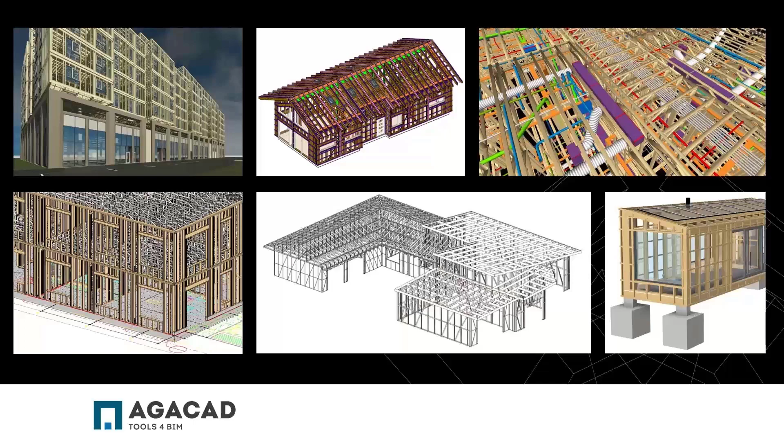So the key idea is to build BIM together, so that when the client side comes to play with Agacad, and us here working at Agacad, that's how the software propels forward, and how it's being developed, and has been developed for quite a while. With the help of clients who face actual issues when it comes to site management, production facilities, or exporting information from Revit to CNC or other formats, that's where we come together and try to find solutions to accommodate those demands or needs.

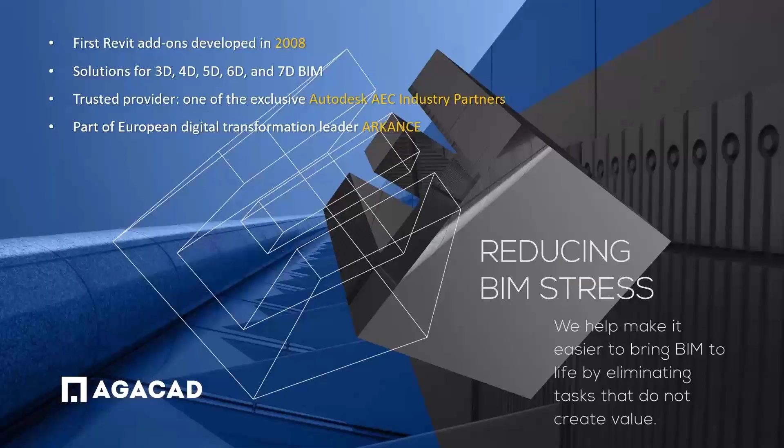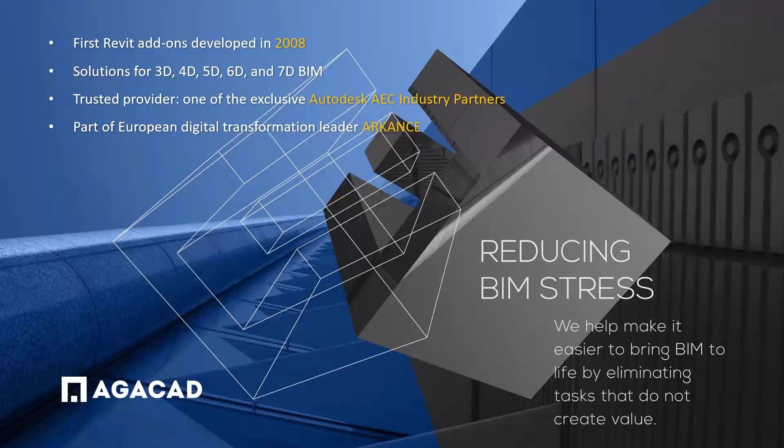The first Revit add-ons that we developed were back in 2008, so quite a while back, and they looked very different from what they look like today, especially when we talk about the user interface and user experience. So the functionality has expanded, but we're also trying to make this as user-friendly as possible, and that's always, I guess, the goal.

One of the goals. We are also an Autodesk Architecture, Engineering, Construction industry partner, and we are now part of European Digital Transformation Leader ARKANCE. That's not recent, that happened about a year ago. So we're now part of the larger thing as well.

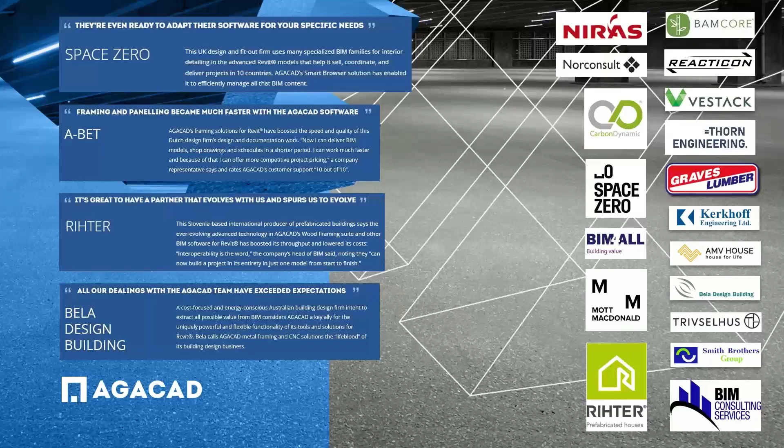We have client testimonials going back some years ago. There are some older ones, some more recent. In the slide, you can see some examples of current clients that gave feedback about using the software and how it benefits the workflows and the overall company performance. You can have a look at those on the Agacad webpage as well.

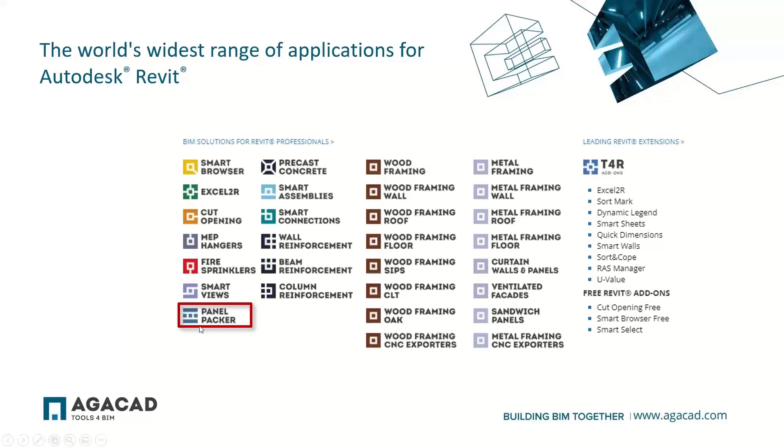Today we'll look at some of the concept of the Panel Packer, how it works, what's inside of it, what's the functionality, what's the workflow.

We'll look at the families, parameters, and placing or creating those bundles or stacks, and so on. For users new to Agacad, I'll guide you to the Agacad webpage first. Under products, you will be able to identify the Panel Packer. Press on that and you'll be taken to the product information page, where you can read through and watch the video there.

That's just the simple key information. We have a free trial as well over here. The free trial will take you to the Dock webpage within agacad.com, and from here you can download the Tools 4 BIM Dock. This is actually the only way how you can access the software or start using a trial of the software, by downloading and installing the Tools 4 BIM Dock.

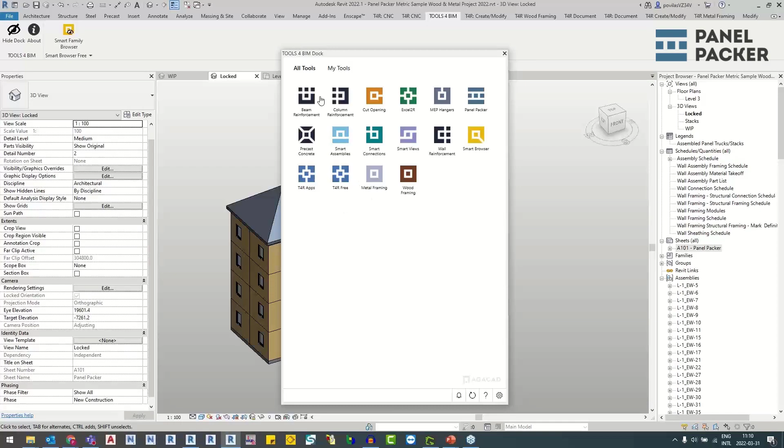You press on that, and you go for Show Dock. Now in the Dock, you have the entire portfolio of the software, and you just navigate to whatever piece of software you're interested in. If you're going for wood framing, you go there, and you have different packages available, and each package consists of pieces of software or add-ons bundled together in a package.

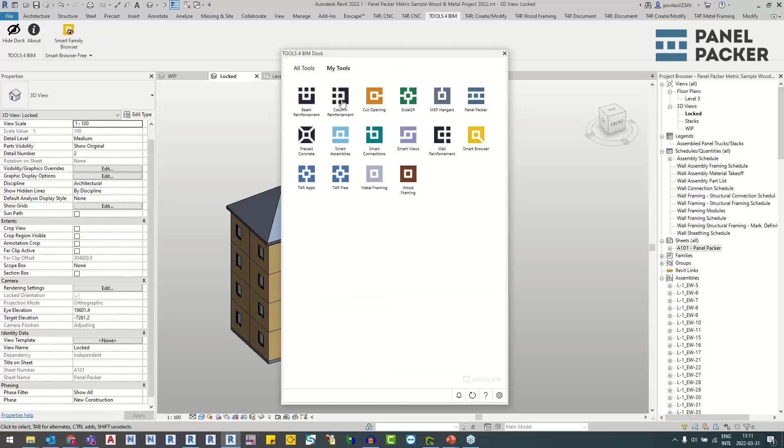So if we're going for Panel Packer, just go for the Panel Packer, and it's really not a package, it's just a tool on its own. Because I now have my license with Panel Packer activated, in your case you will see a different kind of page over here.

It will ask you whether you want to begin a trial, so you can do that. The trial is 14 days, and you can try out the software. Same goes for wood framing, metal framing, and other parts of the software.

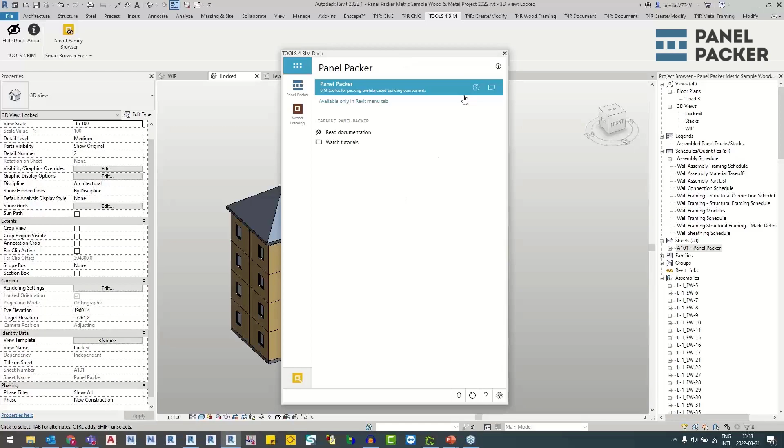So that's the Tools 4 BIM Dock. Now, once you activate Panel Packer, it's currently housed under T4R CNC, actually. This probably is going to change in the future, but it's currently over there, so Tools for Revit CNC. If you press on that tab, you can pull out the Panel Packer.

Just from looking at it, it's quite a compact piece of tool, not too complex. It's based on configurations, just like our wood framing or metal framing. It's quite compact, I would say.

The next bit I want to highlight is the e-help. For new users who don't know how to use Panel Packer, what it is exactly, what it does, you can navigate to the e-help page, online help page, from the e-help button. In here you have some technical documentation you can read through, some links to webinars and other video material, but also sample projects, both in metric and imperial.

Going back all the way to 2019, you can download those and kind of start there. That would be a good place to start, actually.

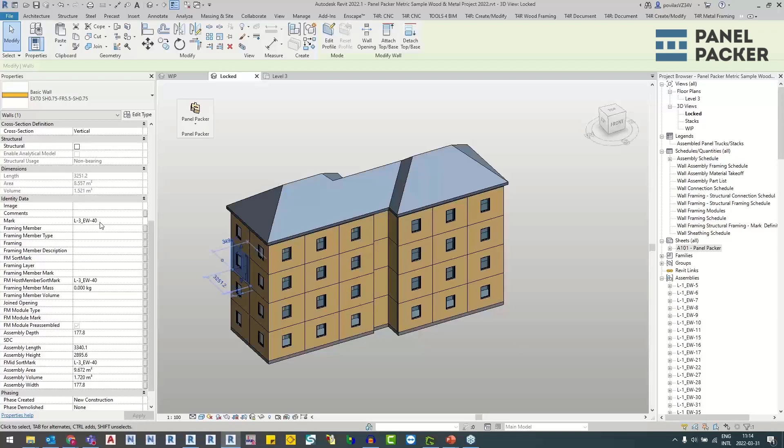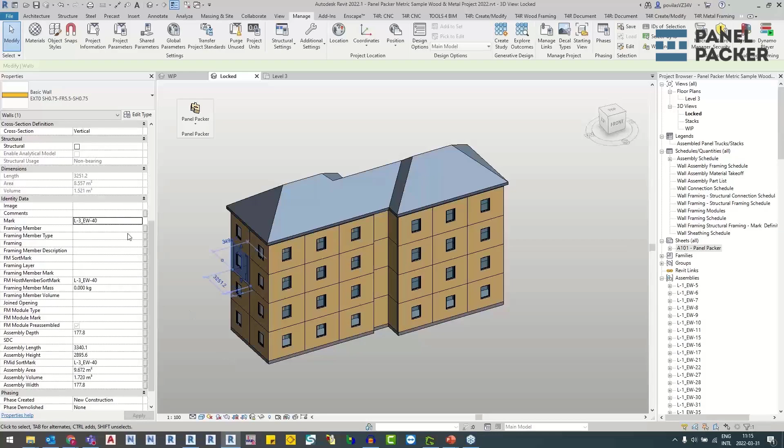Each wall has its own unique ID, so that's the starting point. You need to know which parameters you're going to go by to build and define your Panel Packer configurations, as it's based on those parameters. So level 3 external wall 40 - this kind of format or numbering convention helps me later identify and stack all the walls based on level, interior and exterior walls, etc.

That's the first step in this project. The next step, we used wood framing, in this case Wall Plus, and produced a framework for all the walls we had modeled. It's quite straightforward framing, nothing too special. We have some windows, some doors, and all the walls placed at the corresponding levels.

Once we've done that, we created assemblies for each wall structural framing assembly, named by the mark parameter of the wall itself, which has quite a few parameters. We have framing truck type, column number, and row number. Those four parameters come together with Panel Packer and will be filled in when we move into the packing or sorting stage. Generally we have things like dimensions, weights, depth, mass - all these typical things we can produce with Wall Plus.

Back to the naming convention that will be useful for us - in the comments section I've named Unit A and Unit B, splitting my building based on the two units I've thought of. That's just an example. You can use any empty comments or create new parameters and fill them in with identity information, so later on you can sort the assemblies easier.

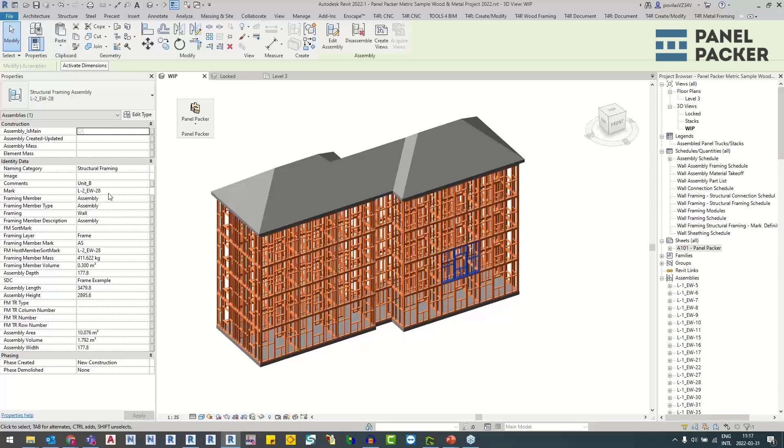Now if I go and pack all wall assemblies, these are the configurations I have created at the moment. I can pack only Unit A by level, only Unit B by level, level 1 structural frame, or interior versus exterior by level - different kinds of configurations I can come up with. I believe this will also be the set of configurations you see, since you'll start with a default set upon which you build your own database of configurations.

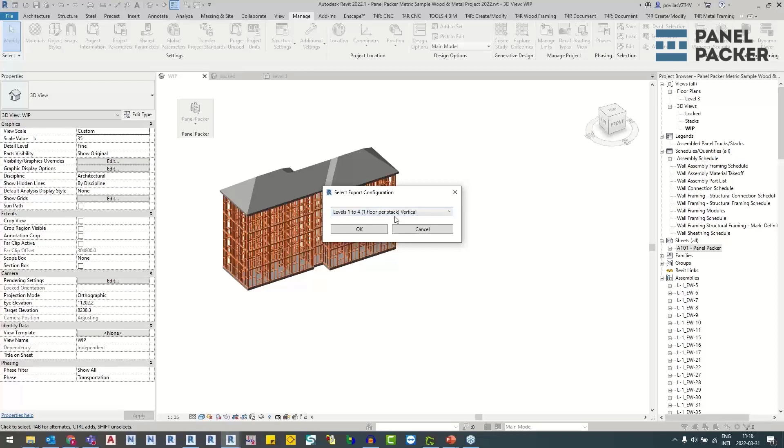So if I go to pack walls, perhaps this one - level 1 to level 4, one floor per stack. Each stack will house assemblies for an entire floor, placed vertically. In this one, I'm not differentiating between Unit A and B.

You press OK, and then press on the empty space anyway. You can switch to plan view and press anywhere that won't get in the way of something else, just somewhere on empty space, in 3D view or plan view.

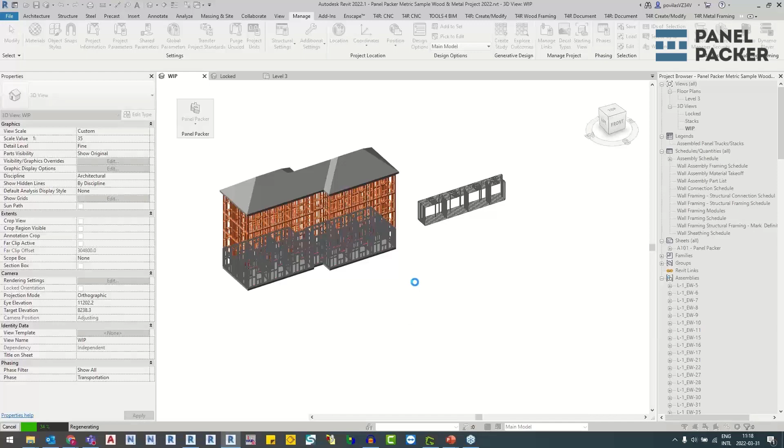Now the configuration is set up so that each click of my left mouse button creates a new bundle or new stack. Level 1 is just over here - I can create a level 2 stack, level 3, and level 4 eventually. It's kind of subjective, just pressing on empty space, but that allows the software to create the stacks.

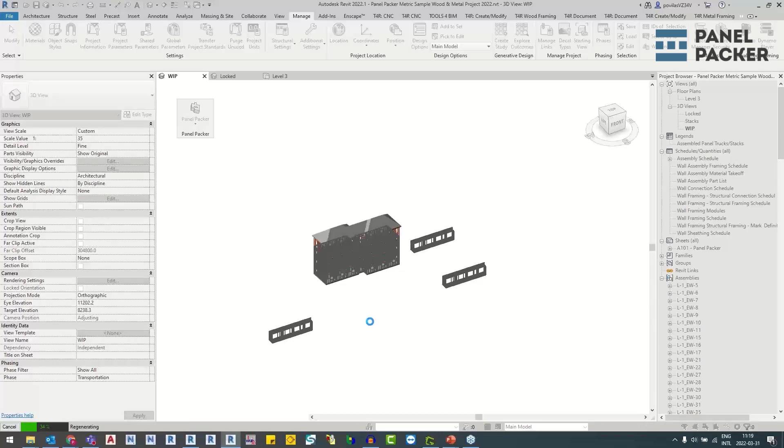You can later move those stacks or bundles anywhere you like - place them in design options, place them in phase options, in work sets actually. You can do that as well.

Now you can notice the colors have changed to indicate what happened in terms of stacking. The color comes from this being a sample project - you'll have the exact same project if you download that. So the color coding comes from the filters I've applied.

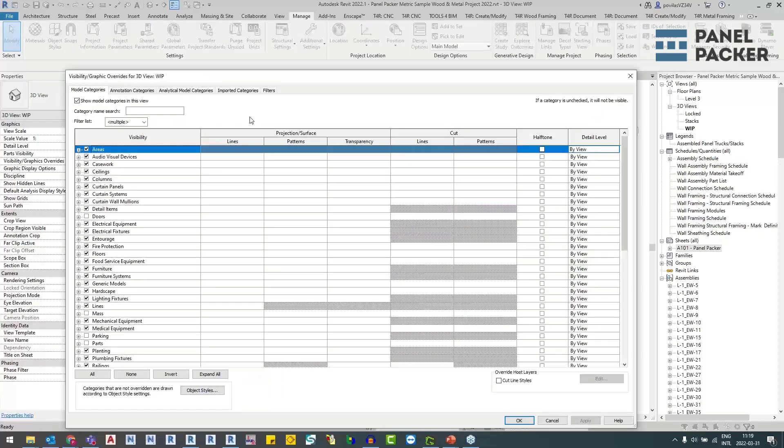Before going into filters, if I select each or just one assembly, I can see those four parameters have been filled in - that's the truck type, you could say the truck name or a stack or bundle name. So that's the name, the column number, truck number, row number. We know exactly where this assembly belongs, and we can identify it just by looking at the colors.

Now if I go to graphics and visibility overrides and go to filters, I can see I have set up some filters and incorporated some color coding. The filter is enabled, and if I go into the filters, you can see I have 10 different filters, and each filter is really looking at framing truck number.

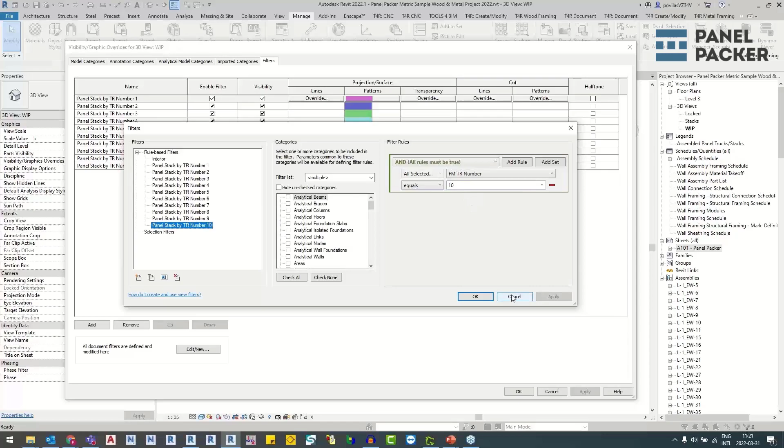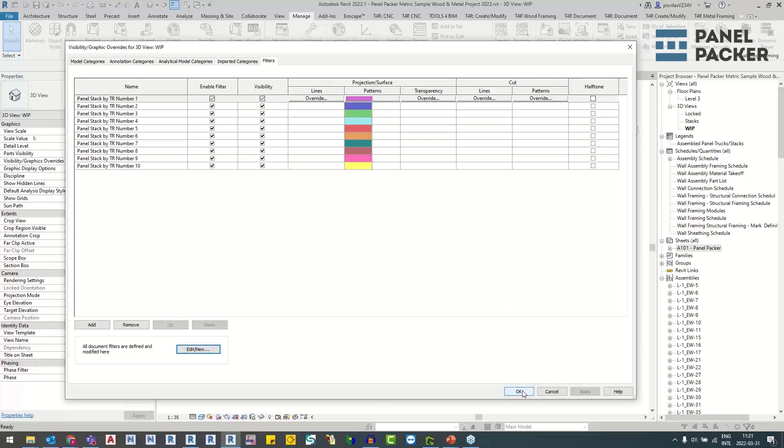So truck number equals 2 or 10, that will be a different color based on the coloring filters. That's the idea, and I find this quite convenient to use the color coding throughout the project, whether it's a 3D view or plan view.

It just brings some more clarity, I guess, to the project. So the other bit is that the elements are placed vertically in the stack, and each stack is an assembly of its own right, but that's a generic model assembly, because I can go into the assembly and select any element.

And it has information as well, inherited from the actual assembly. So the parameter values have been taken from the assembly, and we know which assembly. So this one represents the L1EW16 wall assembly, in terms of size, depth, height, length, mass, volume, and we know exactly which assembly it is.

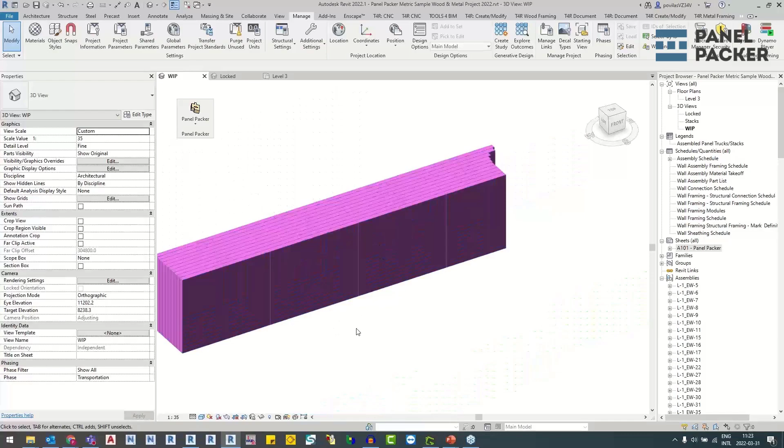So that's pretty much the idea. It's looking at each assembly's size and other identity data information, and reproduces all that information in the form of a generic model family, correct in terms of size, proportion, and naming as well. It's placed in the stack based on the configurations we have used. So that's why it is a generic model assembly, because it contains generic model Revit families, and it's also an assembly.

You can disassemble it, kind of shuffle the stack, but the point of this is to use configurations and put together stacks of wall, floor, roof assemblies or panels. So if you disassemble this, we can do that, but it's kind of losing the point of using the panel packer. So that's a generic model family.

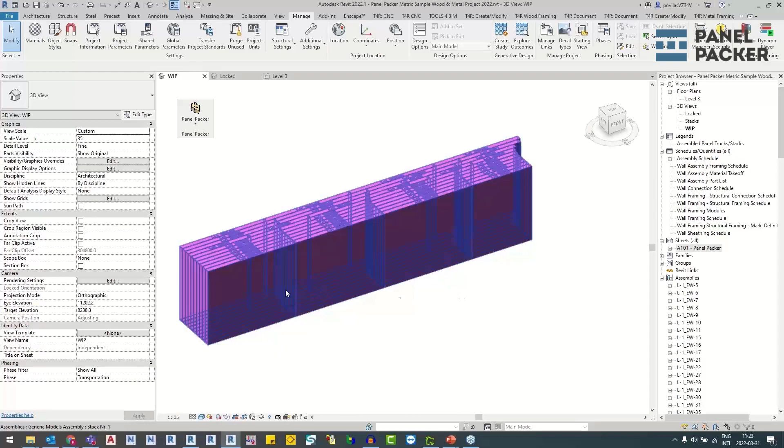We can zoom in and we can see the marking actually tells us here what it is. We have some type parameters, materials, so name material - that's general material for this.

I mean, we can change how this looks. Name, depth, text size - we can change that. We can apply also material to the text, I guess. You'd probably just want to apply something that would stand out, maybe black or anything like that.

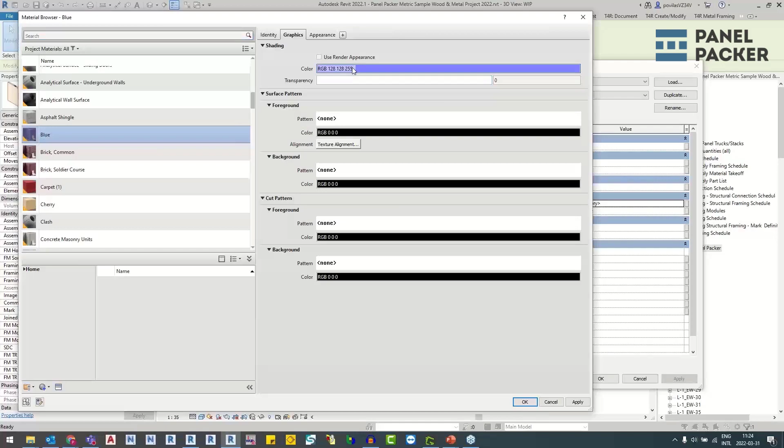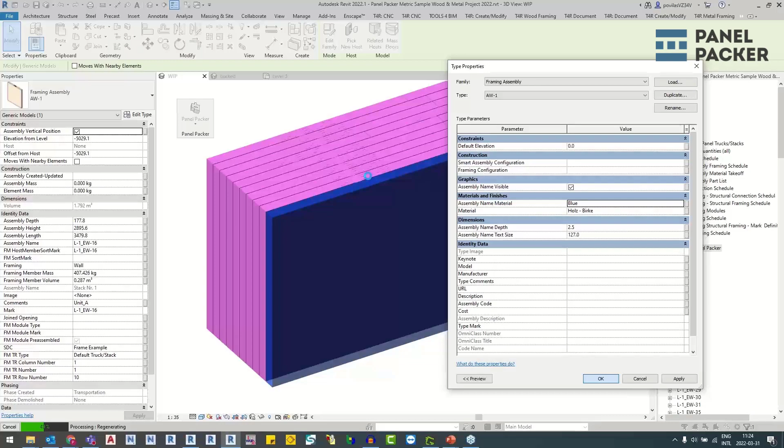So that way you can identify just by looking at the color coding or the marking of each assembly, or you can create a schedule and have all of these generic model families that represent your assemblies shown in the schedule. You can also schedule things based on a bundle or stack.

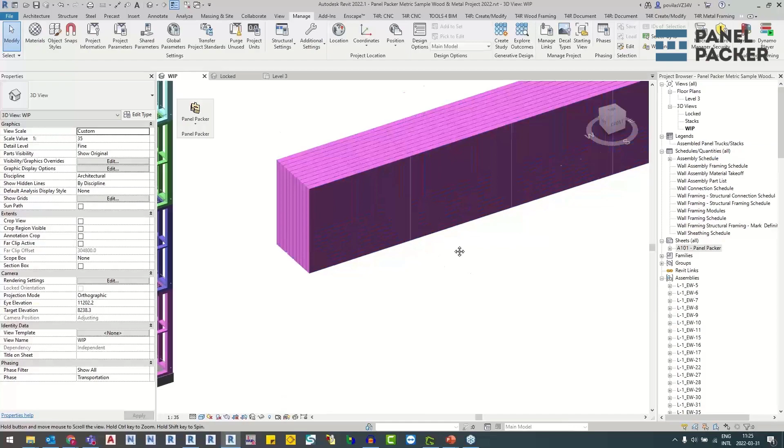You can also go into the family and make some modifications when it comes to graphics, visibility, text, etc. So you can do that. And now if I go to level 3, we have the 4 stacks all over the place.

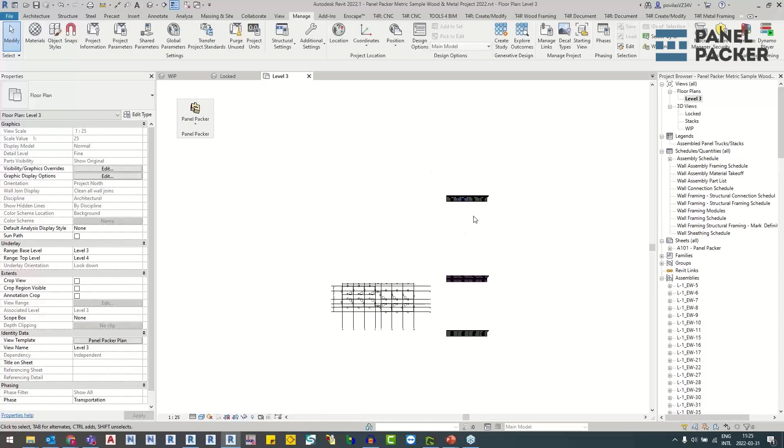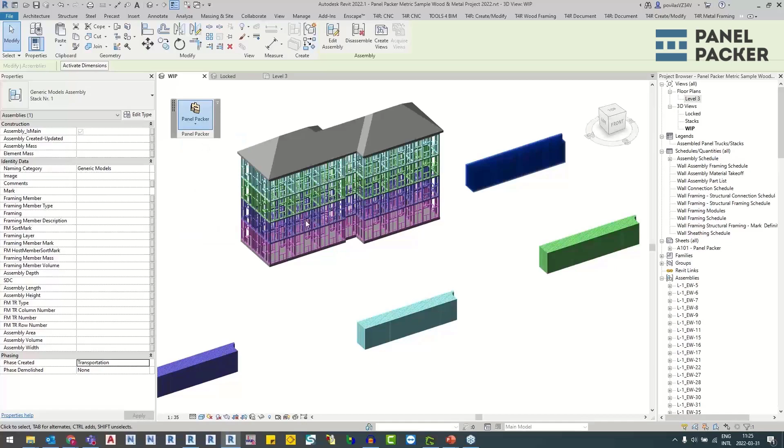The other thing, please note, is that if we go back to 3D view, they are placed in transportation phase. That's, I think, default to Revit. So you can create any phase and place those bundles or stacks in a particular phase. You can go into packing configurations and set up in which phase this will be placed. I've chosen transportation. So if I switch to new construction...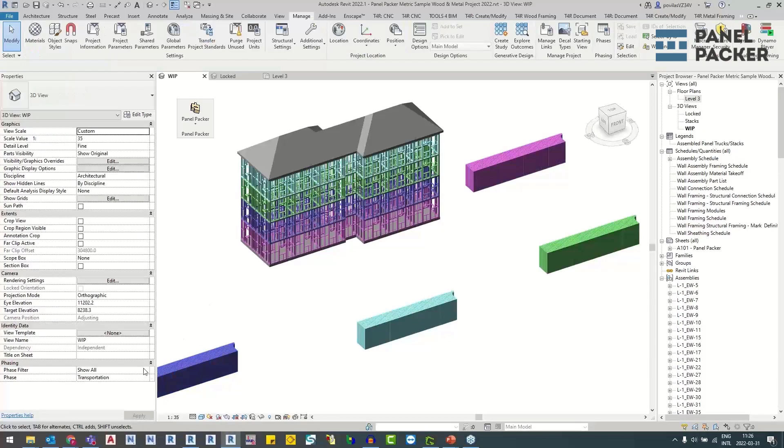Sorry, did I place this one? Okay, I wanted to switch my view to new construction, and in that way the stacks or bundles are not in the way. So that's perhaps a convenient thing to have.

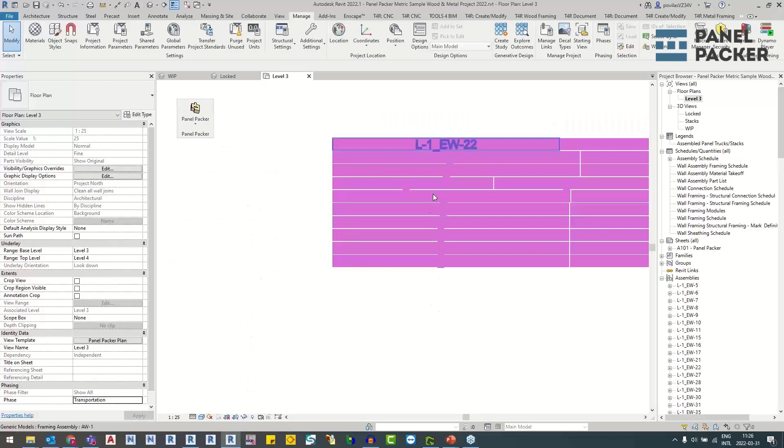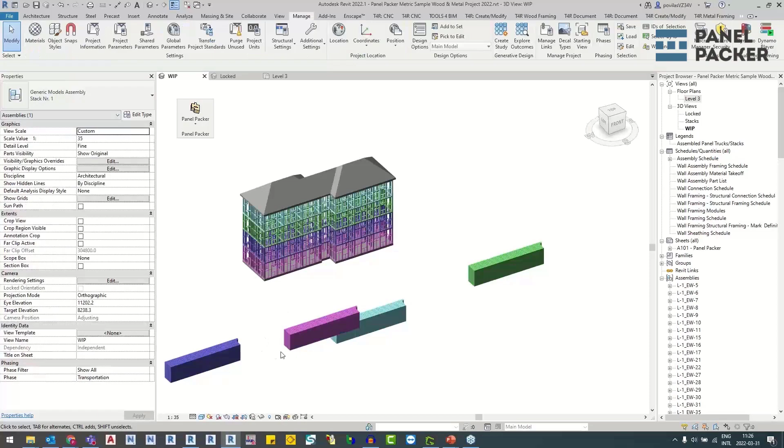So going back to this view, I'm able to read what is where, and also should be able to move those stacks as well, so you can move them anywhere you like. What level is it? It also tells me stack number 1, 2, 3, 4, etc. So you can move things around, obviously.

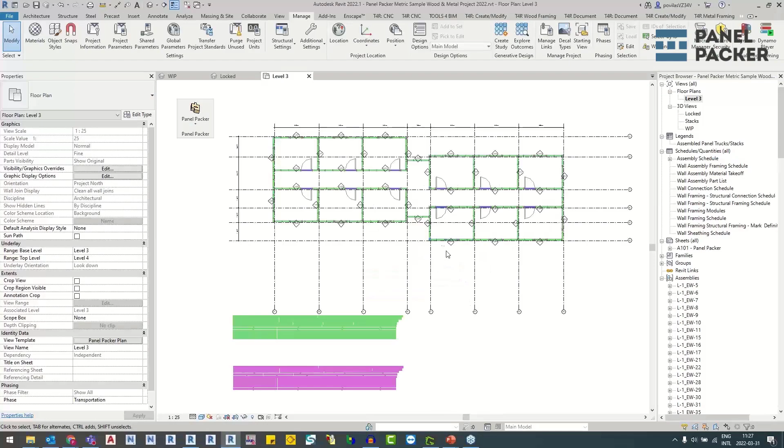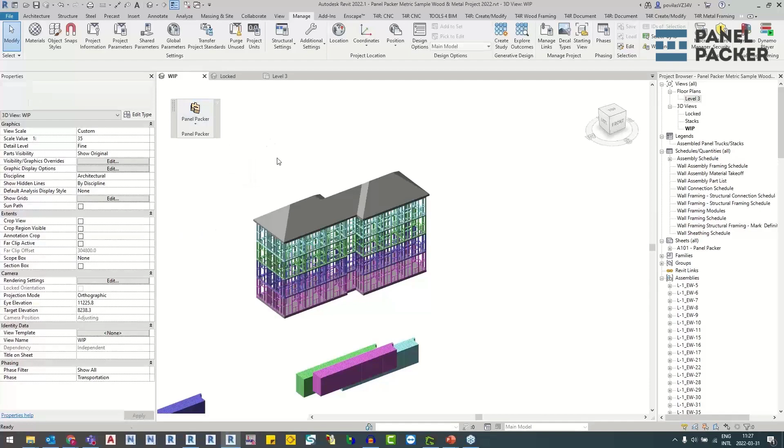Yeah, so that's pretty much the idea. And I guess that's really the functionality - it should be positioned properly in the 3D space, but that's pretty much the functionality. I don't want to go into the configurations too much. We could have packed our walls using a different kind of configuration, but that depends on how you set this up.

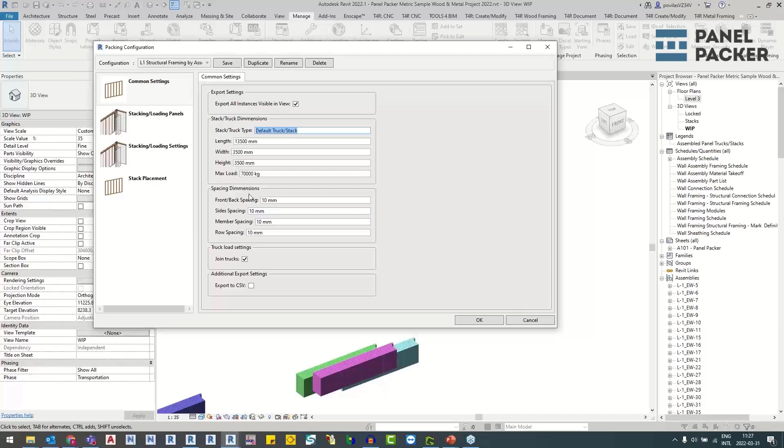If I quickly go into packing configurations, these are different configurations. Some common settings: you can change the name, spacing between the panels, etc. Stack placements by single point or separate points - we've done 4 separate points actually in our example, and the phase as well.

And over here, that's where we define how the stacks, based on what parameters, will be defined and put together. So we're choosing certain parameters, taking the first, second, or third value of that parameter and adjusting things that way.

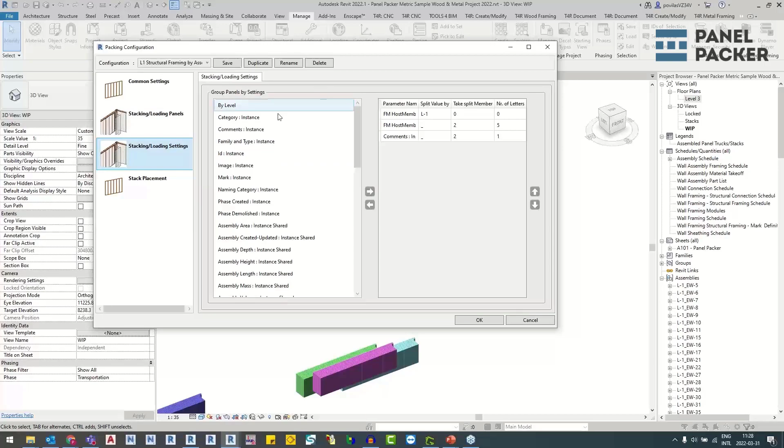We also have the filtering and stack orientation. That's kind of a compact set of functionality as well. I guess the main area is over here, the stacking and loading settings based on the parameters. That's pretty much the idea.

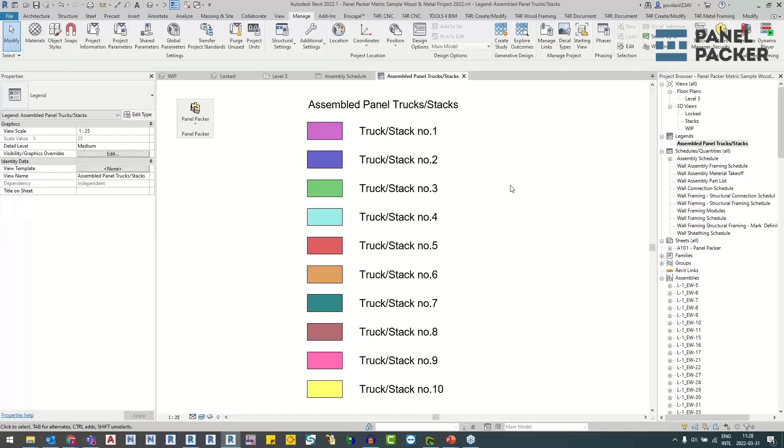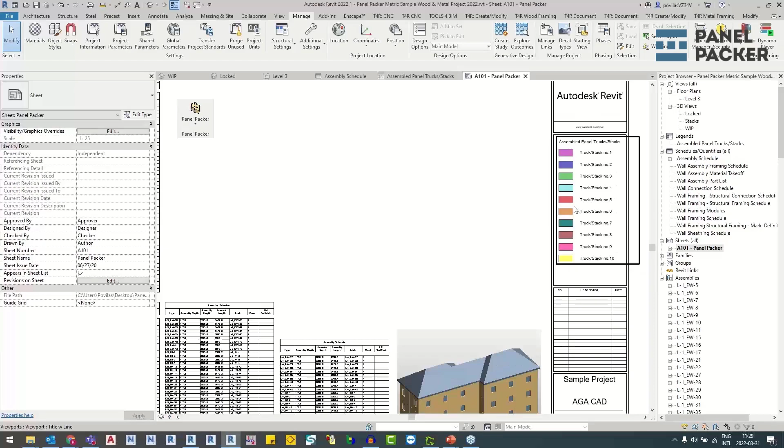And yeah, so also these are all different assemblies - sorry, that's the assembly schedule. That's my legend. I'm looking for my sheets, which is over here. So then you can place things on the sheets. I have created a legend based on the color coding, and I also have the assembly schedule.

So that's just an example of how we can put together sheets with schedules and views if you're defining your stacks, and the sequence in which the stacks will be delivered on site, whether that's site work or the facility. So probably just like to place a 3D view.

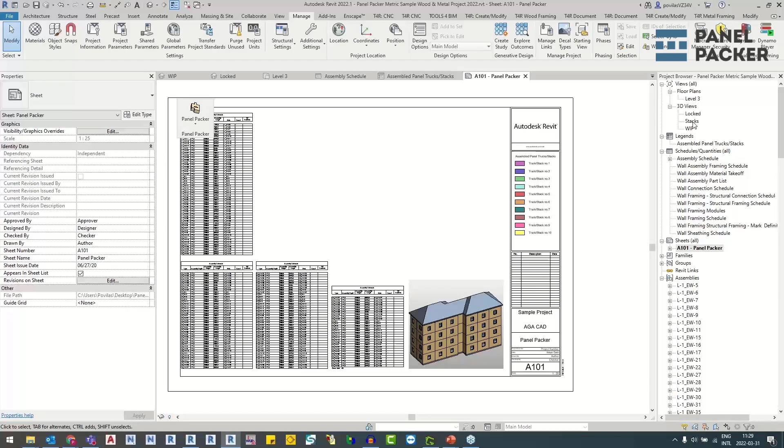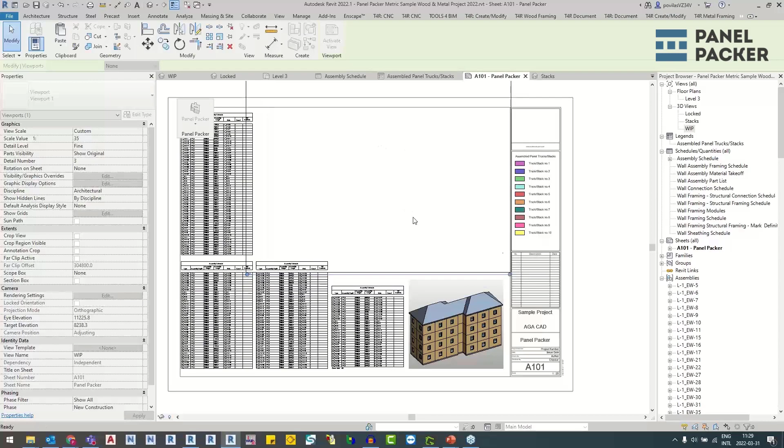So yeah, we want to change the scale, and kind of go from there. I mean, we can use smart views to produce more elaborate kinds of views if that's necessary.

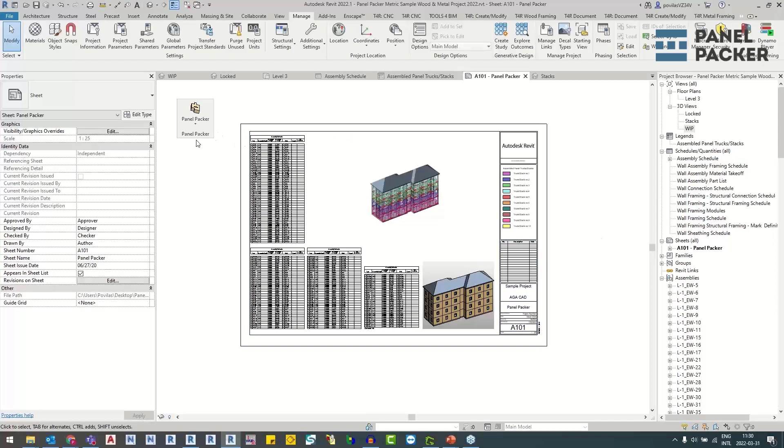So there are other parts of the software that would complement the panel packer as well. I guess the other bit I'd like to mention is that the panel packer uses a sort of linear programming or optimization algorithm.

This allows panel packer to do what it does best and is designed for - that is, to minimize the waste. In this case, the waste of space in the stack of wall panels. It takes all the sizes of wall assemblies and shuffles them in each stack to optimize for the best use of space with the given height and length values that come from the assembly.

That's basically the assembly size. So that's the idea - it works to reduce or optimize for the use of space.

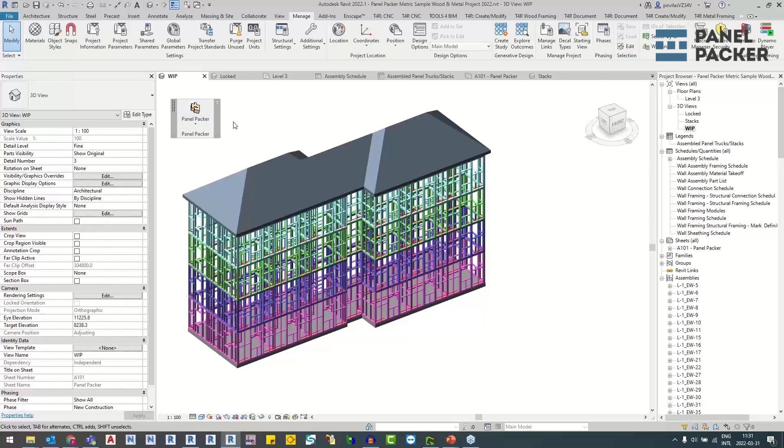So like with other tools, there are plans to bring in new functionality or extend existing functionality, and make panel packer as intelligent as we can. There's room for that, I believe. We'll probably see in the future more elaborate versions of panel packer.

Okay, so that's pretty much that, and I guess the few takeaways would be that panel packer can utilize some of the latest industry trends or construction methodology, especially as we move more and more towards prefabricated offsite construction. At least from what I'm seeing from our client base, a lot of this is moving to prefabricated construction, also when it comes to CNC and paneled construction methodology.

So panel packer also allows working with central models. This really doesn't involve any alien sort of methodology to Revit - as with all of our software, this works alongside or together with Revit. So we're kind of bound by Revit's rules and environment.

So panel packer obviously allows for working with central files, whether those are located on the local area network or a wide area network like a cloud server. There will be no problems there, actually.